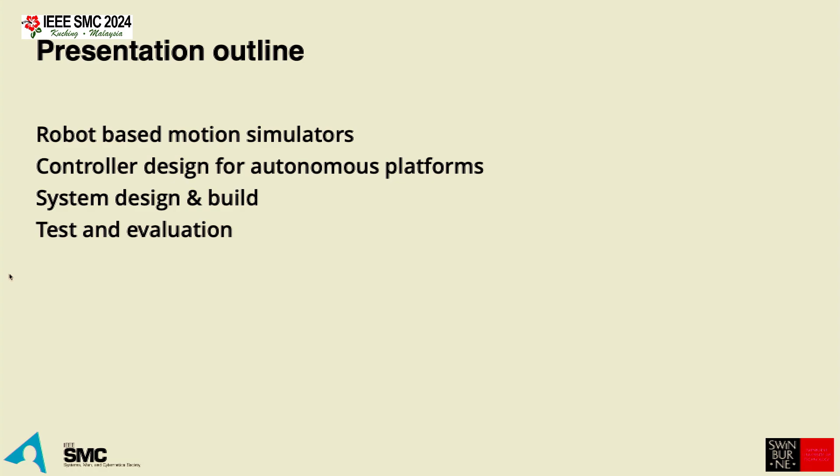The outline of my talk is going to be around robot-based motion simulators, and there's a reason I've selected this topic, which you will see, and its relationship with autonomous systems, then controller design for autonomous platforms, system design and build, and test and evaluation. Test and evaluation, in my opinion, is extremely important. I want to show you the kind of test and evaluation I've done, what it is, how we have gone about it, and the level of complexity involved in terms of real test and evaluation beyond the laboratory.

But before I do that, I actually work for Swinburne University of Technology. Allow me to show a few slides about our university. Our university was founded in 1908 and is among the top 1% of universities in the world. Some of the areas of research where we have professors and academics who are very active.

They are in the area of nanoscale and ultra-low power electronics, working with CERN, the Italian National Institute of Nuclear Physics, ANSTO, which is the Australian Nuclear Science and Technology Organization, and the Institute for Nuclear Science at Kyoto University. This particular topic in terms of design of embedded electronics and radiation-hardened electronics is very important. This is one of the areas we are working on.

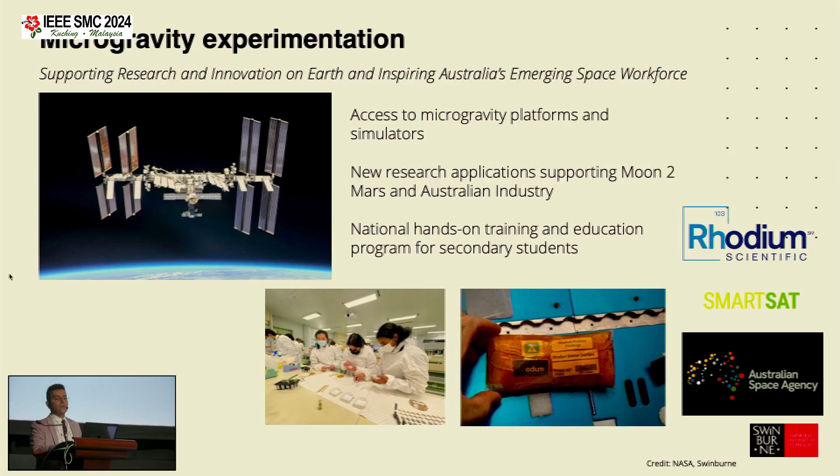In terms of remote sensing, AI for space, astronomy, and remote sensing, our team works with Planet, SmartSat CRC, Ernst & Young, and others, and Professor Kai leads that research. And we do offer engineering courses, anything from certificate level all the way to PhDs. The reason being, we're a dual sector university—not only producing graduate engineers, we also produce technicians, and from technicians all the way to PhD graduates.

Currently, we sit at number 36 in the world in the area of automation and control. Just one of our schools, the School of Science and Computing, has over 5,000 coursework students. By the way, we have a campus here at Sarawak—some of you, as you drove past from the airport, would have seen it. We've been here for over 20 years in Sarawak as one of the campuses.

Some of the other research which is relevant to autonomy is data-driven road asset maintenance for smart cities. Here we have worked with the city council, put a number of sensors on a series of trucks, and these trucks, as they drive around the city, scan, collect information, and look at the road conditions, road sign conditions, cleanliness of the road, and so on, then feed that information back to central points to create a cleaner environment.

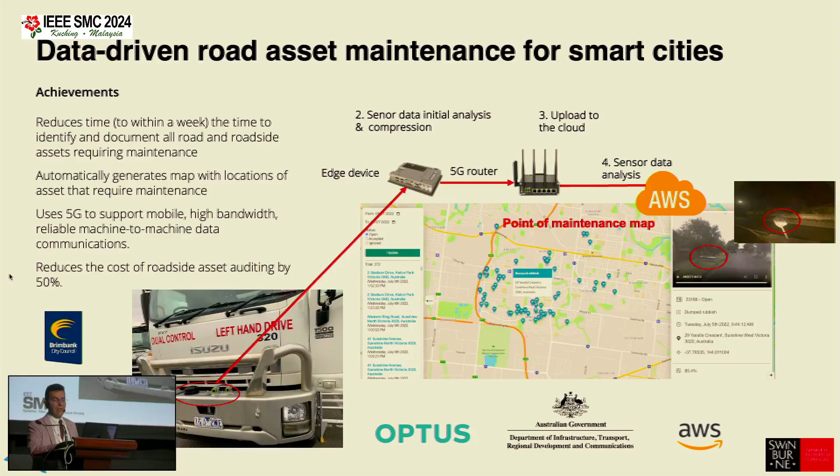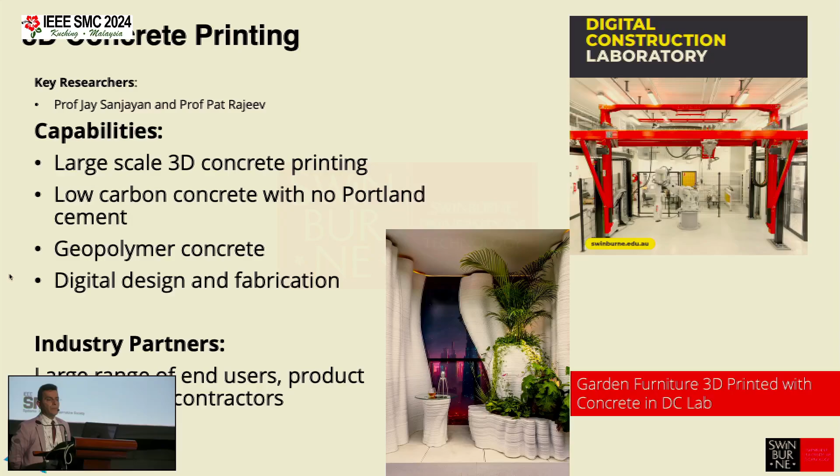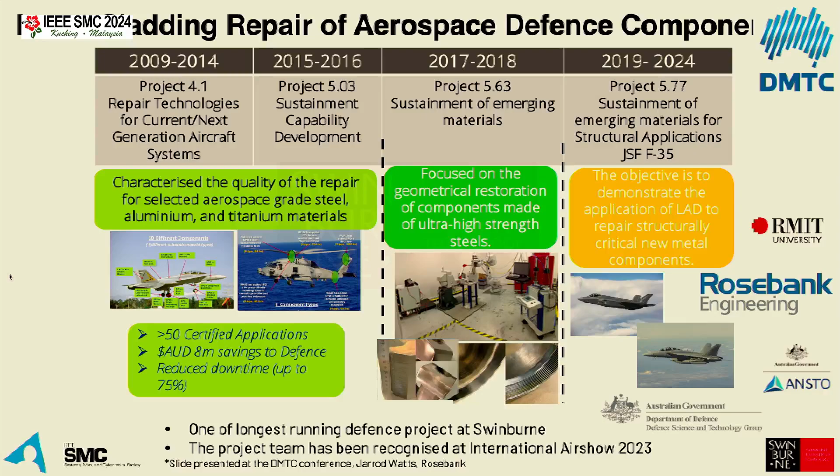Another area we talk about is large robots, robotics. We have several of those at our university in Swinburne, but different uses of those robots. We are using big robots to 3D print concrete. This is a very large work envelope, maybe a third of this auditorium, and it can print concrete. You can create new designs, complex designs to be prototyped. Then in terms of laser cladding repair and aerospace defense components, we work with a number of defense companies in the US, Australia, and around the world, and we have some projects around the JSF F-35 in terms of sustainment. So these are all the hard work of our research area.

Another one is NanoLab 3D and nano micro printing. The guys there are very active in that area of research.

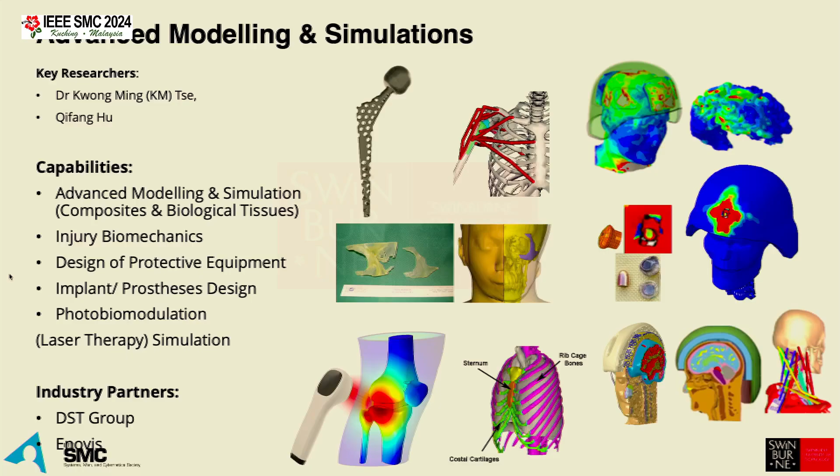And I think this is the second last, modeling, advanced modeling and simulation. We have several researchers looking at design of better helmets, whether it's a bicycle helmet or combat helmet. In fact, a new design having an airbag inside the helmet, and then doing biomechanical analysis, modeling, simulation, FEA, and so on.

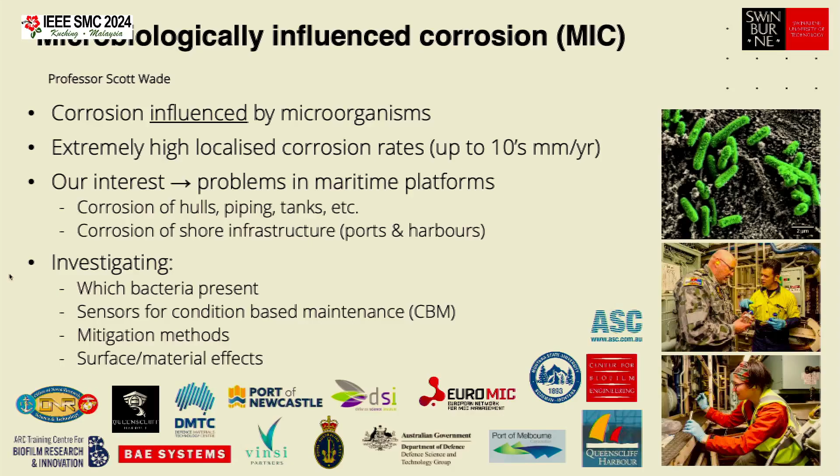And finally, one team is working on certain types of corrosion resistance coating for anti-fouling. This has a huge application from defense, Navy, all the way to contact lens manufacturing, because they have similarities, and we have a national center of excellence around that.

But let me come back and talk about the topic here. I want to first specify and define a couple of terminologies: human in the loop, and human on the loop.

A definition of human in the loop: a machine that performs a function for some period of time, then it stops and waits for human input before continuing.

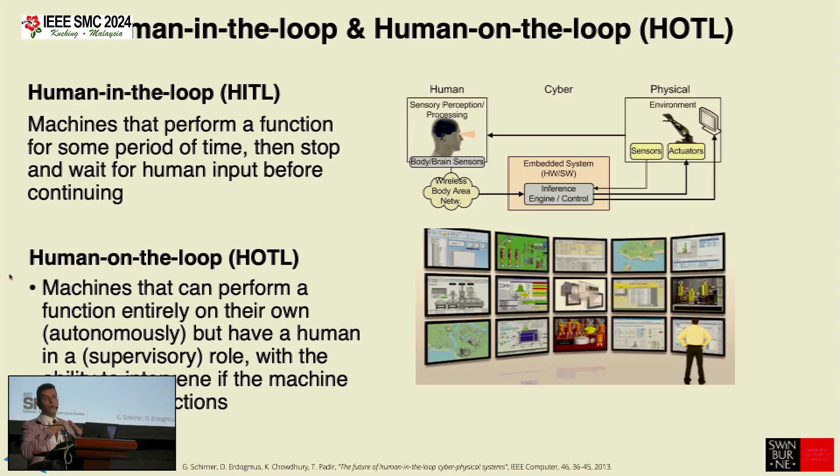So human in the loop, human on the loop, but I've always argued that we never want human out of the loop. I've put my neck on the line, and I've argued for many years, and that's my position. There are some good reasons when you want to develop for the military and those kinds of things. You don't want humans to be out of the loop. You always want humans to be at the apex of control decision making.

This is my position. So in terms of perception and sensing in autonomous systems, perception involves sensation and interpretation, including sensation for evaluation and detection of objects in unpredicted environments. This is very important, because if we can have some sort of prediction in an environment, if we are talking about using vehicles other than in cities, then the unpredictability plays a greater role.

So then in terms of sensing, autonomous systems require enabling sensing technologies. This is for 3D measurement, state estimation, intelligent mapping, and object recognition. Not all of the objects that we deal with in the city area are the same as if you wanted to use for military use, so there are some differences.

So then all of it comes down to trust. This notion of, if human is in the loop, how can we gain trust between human and machine? If human is on the loop, how do you achieve that trust? And then how does machine trust human? Is there a need for that? And then finally, how does a machine trust another machine?

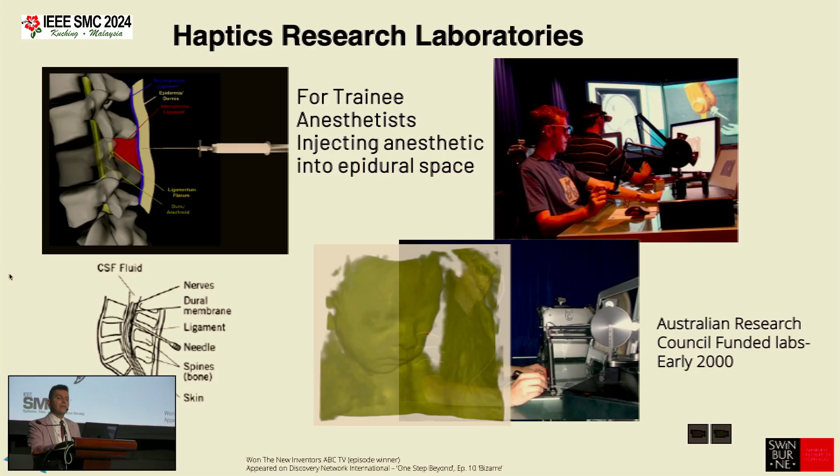We developed a whole series of technologies, and some of it were used for the counter-IED task force, remotely deploying using the system. The robots are haptically enabled, so remotely we can defuse bombs and so on. But as a result of that journey, looking at all of the haptic device manufacturers, such as Sensable, Force Dimension, Haption, and so on, we looked at the capability of those haptic devices, and the kind of capability we were after, which was multi-point haptic, did not exist in the world in a rugged manner to be field-deployable ready.

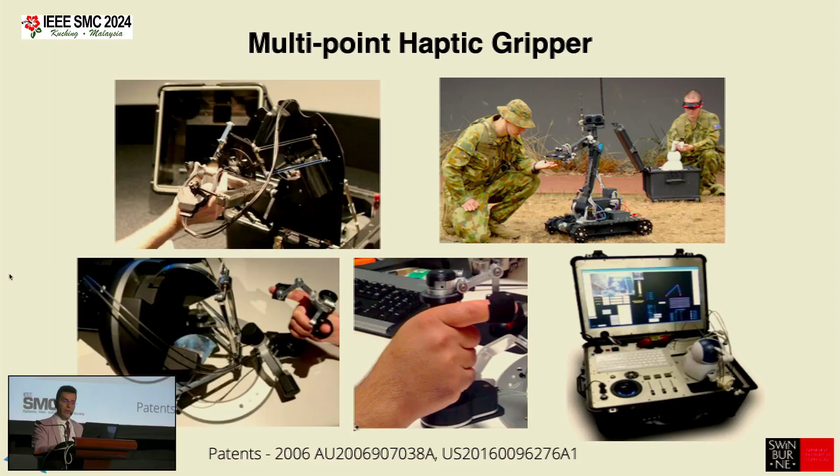And that's where we went back to fundamentals, designed and built our own multi-point haptics devices, commercialized it, turned it into a product, and then went into utilization. Now playing with haptics, backdrivable systems, making teleoperative systems haptically enabled.

In parallel, I started looking at motion simulators. This was when Gino De-Gol patented a robot called Robocoaster in Europe for theme park rides. I approached him and said, look, I'm in a university, I'm not into games, because people won't take me seriously if I talk about theme park rides. However, I'm interested in enabling this technology to make it into a motion platform, to put a human in it, to make it backdrivable, to turn it into a flight simulator, and then into a land-based simulator. The beauty of this system was that the reachability and work envelope was far larger than traditional motion simulators in the market, like Gough platforms or Stewart platforms.

And then playing with haptic technology, looking at haptic steering wheel, haptic gear shift, haptic pedals, and all those kinds of things, having had that background enabled us to put some novelty into this platform, showing how it is fundamentally different from traditional motion simulators, and in particular how it is haptically enabled. You need a haptically enabled motion platform because when you use it for driving or flying simulation, to give realistic feedback over and above motion sensation, development of your washout filters is very important, because it all comes in to give you a greater sense of motion and realization of it.

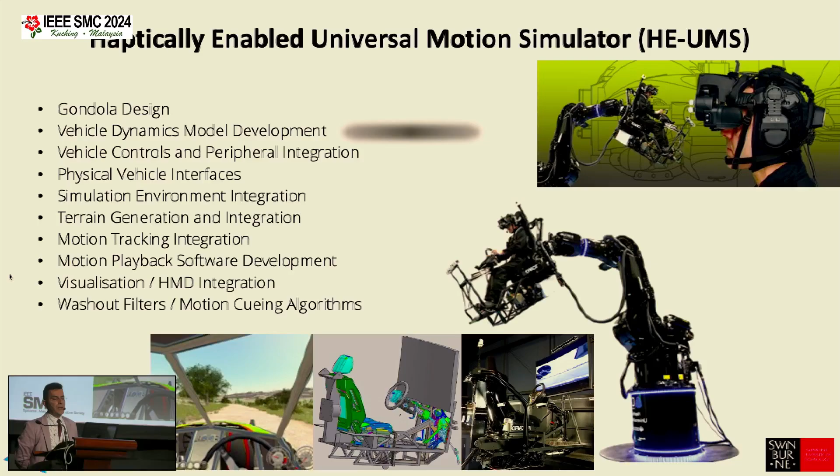So we had to design gondolas, look at vehicle dynamics model development. These are really serious areas requiring deep knowledge, and a lot of automotive or vehicle manufacturers, whether land, air, or marine vehicle, work in this field because that's their core business. So we're entering an area, and we're blessed that since the idea was crazy and novel enough, it attracted the automotive car industry, some of the largest in the world. I won't name the car companies because I'm not advertising for them, but you would have heard of those big giant companies both in the US and Japan.

How we argued this system is better than traditional systems was that the range of motion it gives you is far greater than a traditional Stewart platform. And then I identified the holy grail, a particular range of motion that traditionally the automotive industry never looked for. It was a military application, in particular driving tanks. When you're at the knife edge on top of a hill with a 55-ton vehicle, the position of your barrel and how you need to maneuver and control your throttle to drive becomes extremely important.

And there was no motion platform on this planet that could provide that. So we had General Dynamics, Lockheed Martin, Thales, and the CAE systems and so on. They had all been designing and building motion platforms for 40 years. But nobody had identified that capability gap in the market. I identified that and then won a contract with defense and provided platforms.

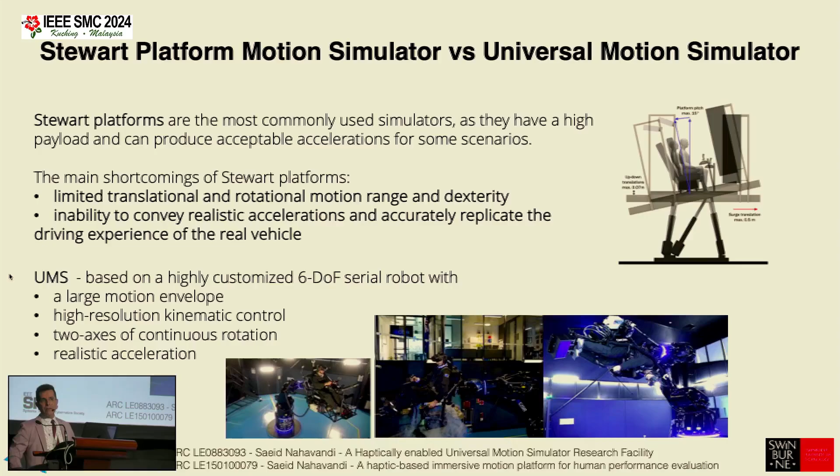Now let me come back here to show you what this system does. Okay, I'm there, I'm trying to find my mouse to see if I can get this working.

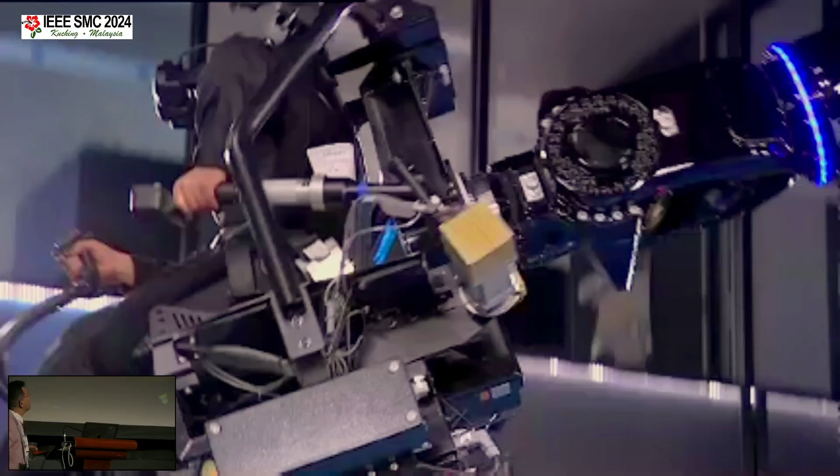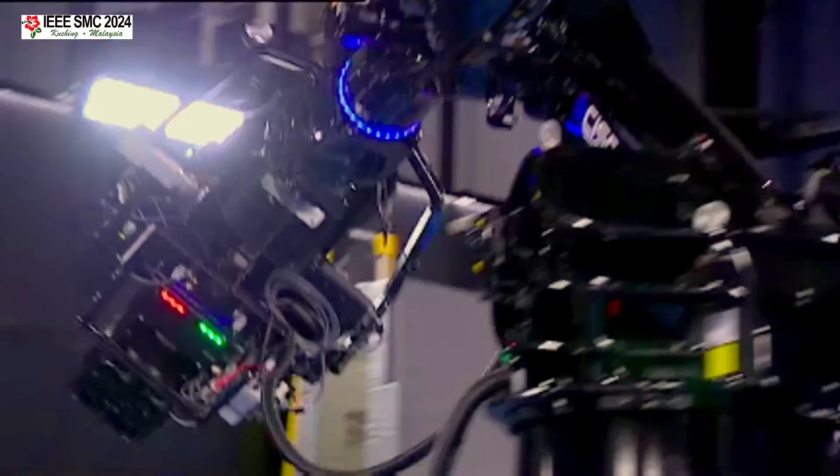Give you a warning. If you're a high-tech junkie who gets jealous watching someone else enjoy the latest and greatest thrill ride, look away now. On the other hand, if you're about to jump into a military chopper or a fighter aircraft and go into battle, you've got to check out this. It's called the Universal Motion Simulator, or UMS, where a pilot is perched on a 7-metre long robotic arm, capable of exerting up to 6 Gs of force... man at the controls of this next generation.

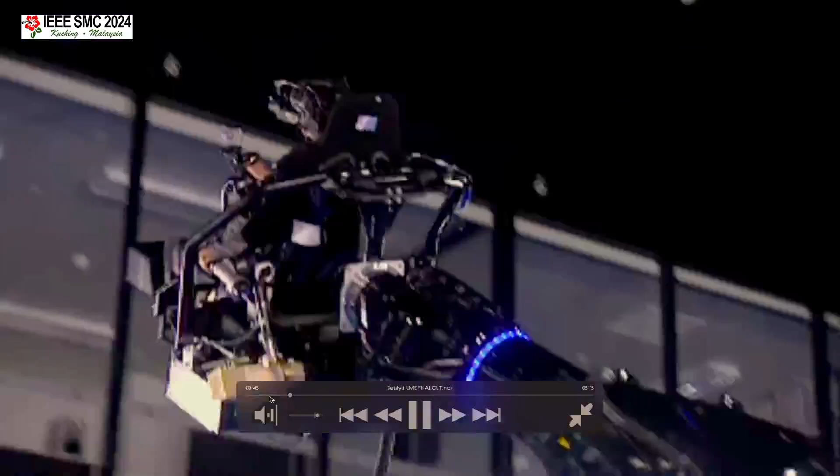It's called the Universal Motion Simulator, or UMS, where a pilot is perched on a 7-metre-long robotic arm, capable of exerting up to 6 Gs of force. That is impressive. The man at the controls of this next-generation motion simulator is Professor Saeid Nahavandi.

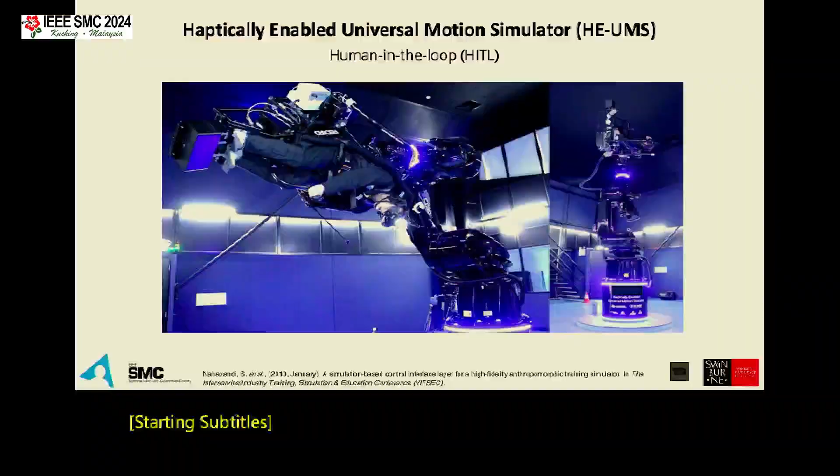The reason I'm pretending that I can fly, but I can't fly a helicopter, a little bit through the simulator I've learned. But what we're trying to show here in terms of designing and building a Black Hawk helicopter, for example, is the kind of range of motion it could give that the traditional simulator could not. And then a particular area called upset training - if any Air Force pilot here, they will know. So to provide upset training, you need to have range of motion which a traditional Stewart platform cannot provide you. And all of a sudden, this became really a popular platform.

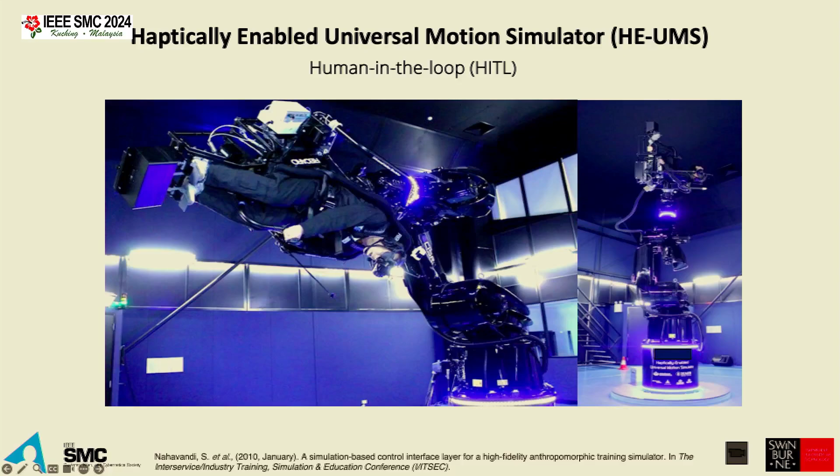So it was a theme park ride. I turned it into a simulator with a capability gap, and then I actually pushed to win projects and research. Then we looked at other types of vehicles, and I didn't stop there. I developed a version that sits on a container base. Then you can take it anywhere - you can put it on a ship, you can take it to any site. So we call this one a mobile UMS.

And again, the devil is in the detail - large load, safety, you're putting a human inside the machine. First time, I always put myself inside all of these machines, vehicles, and so on, and they video me. If I didn't die, that means it's good for other people. If I died, I will know what happened to me.

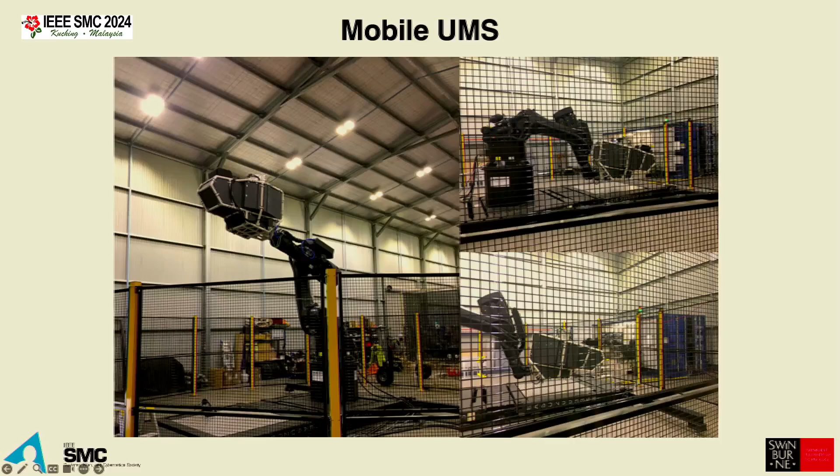So then putting it on a system like that to make sure that it is safe, and to get all of the safety certification to go to be used in industry - I think that step is extremely important. So that's what I mean, that taking it from the lab, but once you actually want to turn it into a product or to be safe enough to be used, there are other levels of complexity in terms of engineering.

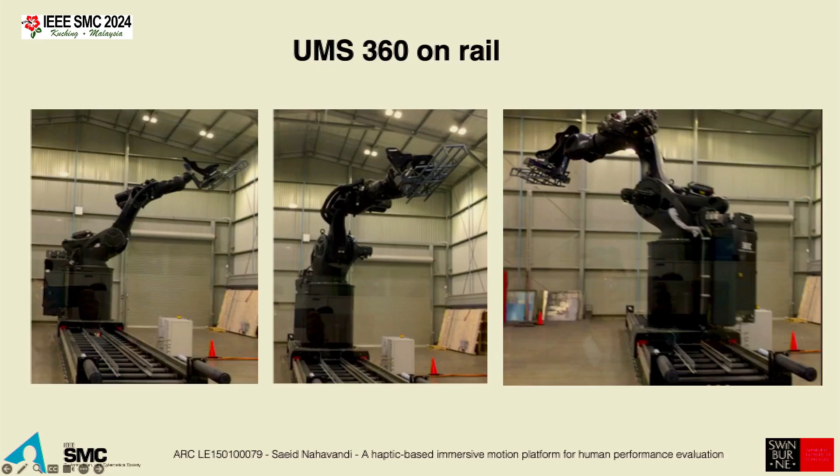And then we developed another version called the UMS 360. So now it's a giant KUKA robot. In fact, let me show you what I mean by that. This system - so you have an entire system rotate.

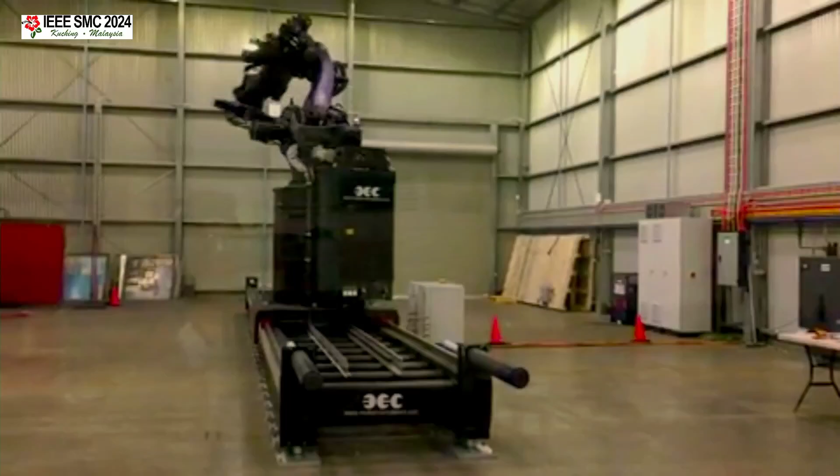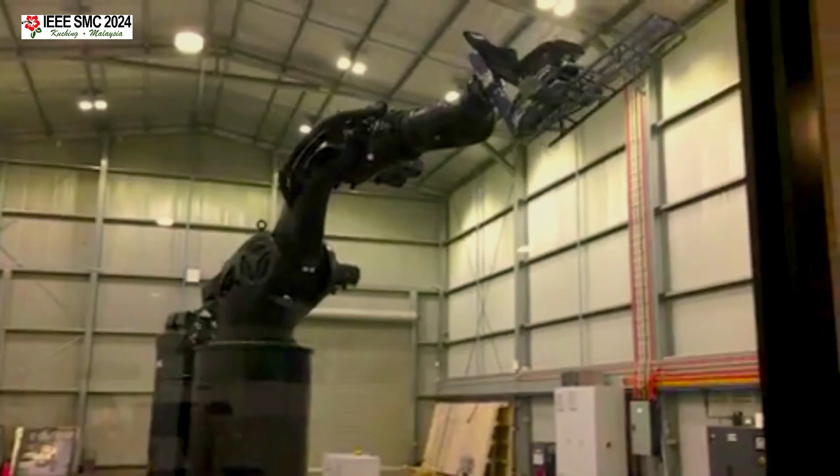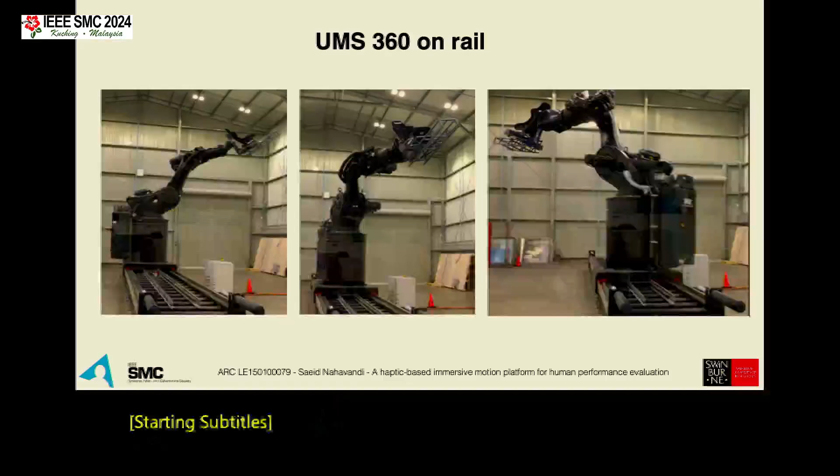So we modified the slip ring, modified the whole controller system design on it, and used a direct drive linear electric motor, with a good number of tonnage on it, and then in terms of control, back drivability. So this particular system has 3 continuous axes of rotation. And then the only other one in the world is DLR in Germany. But this one has other capabilities that DLR doesn't have. So that led us to actually have a joint research project with DLR.

Then going back to that - to validate the simulator, to give you that real sensation, then to become a platform for R&D, and then to put a crazy driver in it, then to run edge cases, dangerous cases, to collect data which then can be used for your AI and machine learning for your autonomous vehicle. That's the connection. A lot of Carla and other software out there, when they are trying to input edge cases, it is very different when you are actually putting in all of the vehicle dynamics behavior of a real vehicle.

You have validated that the simulator is almost a true representative of a real vehicle, and then you drive safely, do crazy things with it, so produce all of the data for edge cases for your autonomous vehicle to learn. So, let me go again here.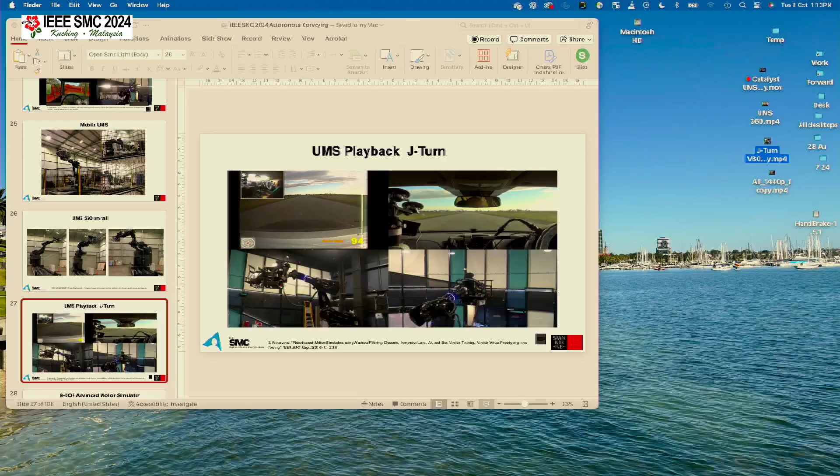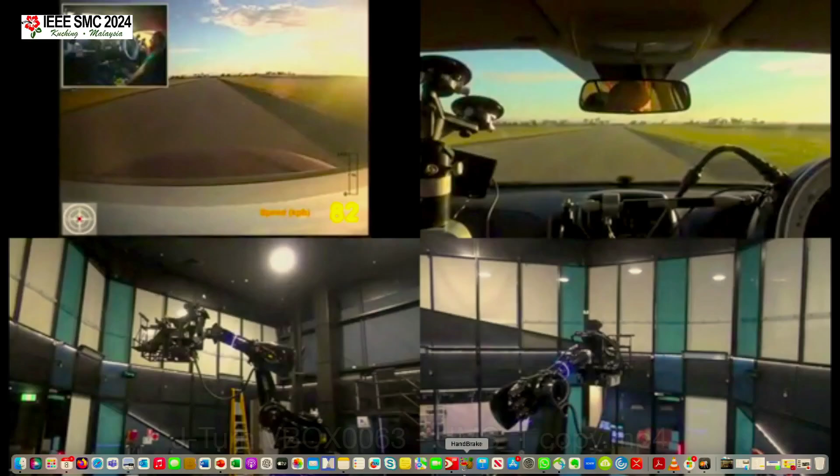So here, look at the top right - a sensorized vehicle, somebody sitting in it, with the ADAS system running, but it's connected to our motion simulator under here. The person sitting gets the exact motion sensation. So we had put IMU sensors on the seat here and on the vehicle. They replicate, produce almost one-to-one.

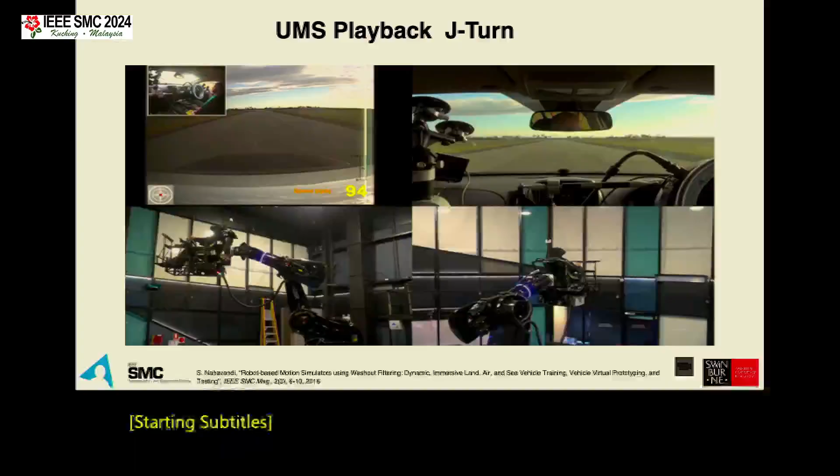So then by bringing people from proving ground working with us - and those are the ones that car industry uses when they are actually developing vehicle prototypes - to validate our simulator. Then we were confident that actually the simulator now can produce almost realistic motion of a real vehicle. And then after that, we said, okay, it's great, then maybe the simulator can be used as a prototyping platform for the car industry.

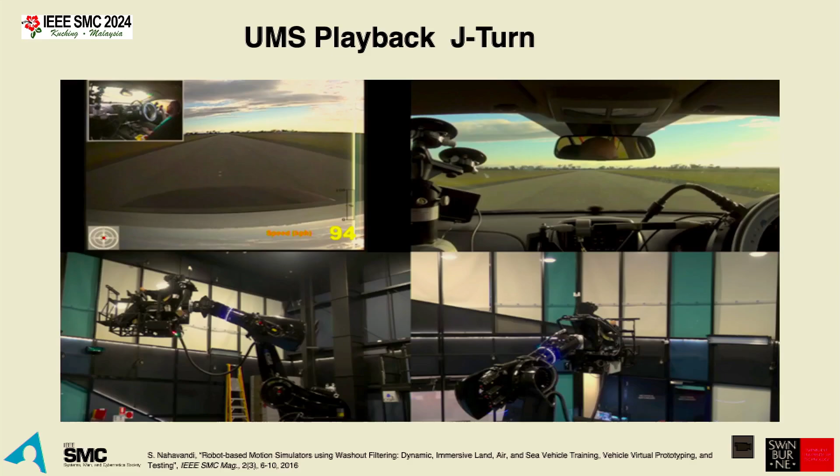Now, a lot of car companies, these days they use simulators as part of the prototyping to reduce the number of prototypes, so they can reduce that product design cycle, reduce it, and also reduce the cost. And then do a lot of experimentation - it's cheaper in the simulator than doing it in the proving ground, like nighttime driving, visibility, ride, comfort, handling, and all the rest. So this is where we landed, actually working with the car industry. I was talking about using that big simulator.

Once we actually sold many of those, that went, set up a company, startup, then defense bought it, and 80, 90 people employed as part of the company. Now we are competing with CAE and Thales and the likes. We secured that market. Then I went back, looked at that.

That particular system can produce high amplitude but low frequency. So I worked with a company in the UK, Ansible, redesigned their platform, and then created another platform. This one won the Queen of England Design Award three years back, and it has 8 degrees of freedom.

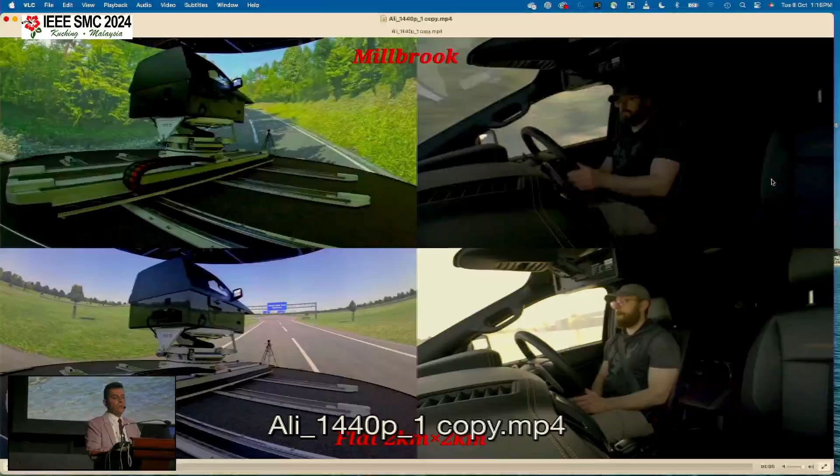And this particular system, you can draw... okay, no, you cannot. I'm on a different window, you cannot see. Maybe what I'll do, I'll show you one of our very excited drivers, you could say.

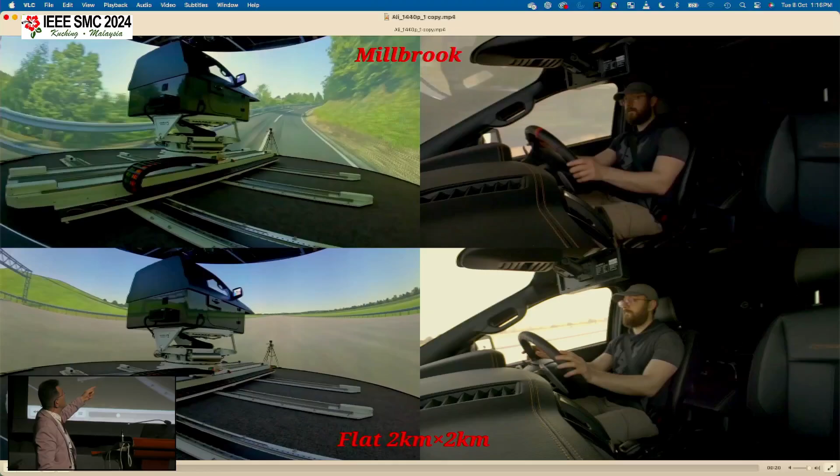So we have a proving ground, we have a racetrack, and this one you can see is 360 degrees wrap-around, so all of the scenes look realistic. This is Millbrook, and you can drive at high speed, 250 miles an hour.

So then I used the platform for behavior analysis, how people take orders, whether they take orders under stress. Then there were other things in terms of drug or alcohol influence. So there is a whole heap of research you can do safely on a platform that can really give you the kind of motion fidelity that is needed.

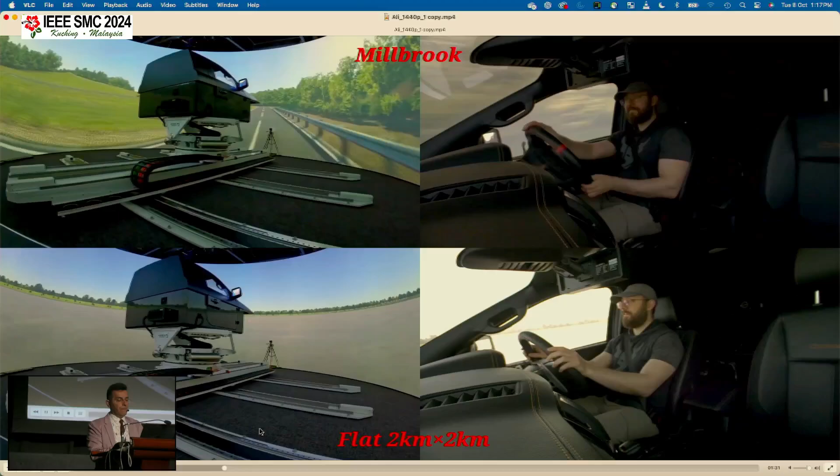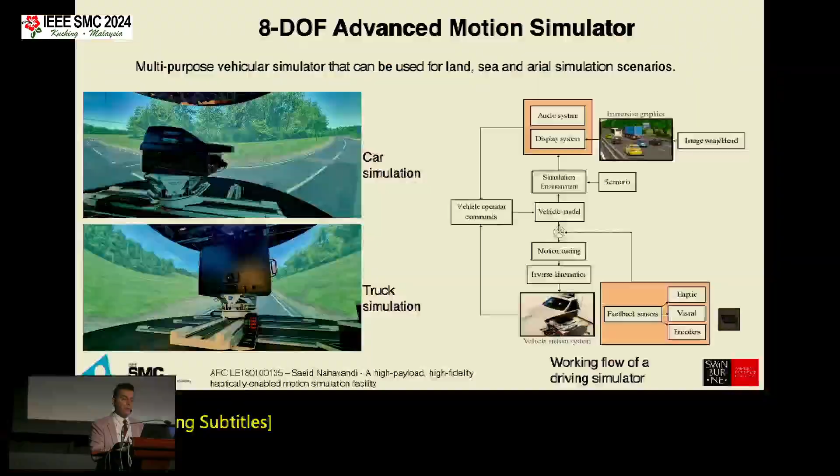And the other thing was having people sit in it for hours to drive and see what happens. So instead of really driving long distances, you put people inside the actual simulator. So then we collected lots of data as a result of this.

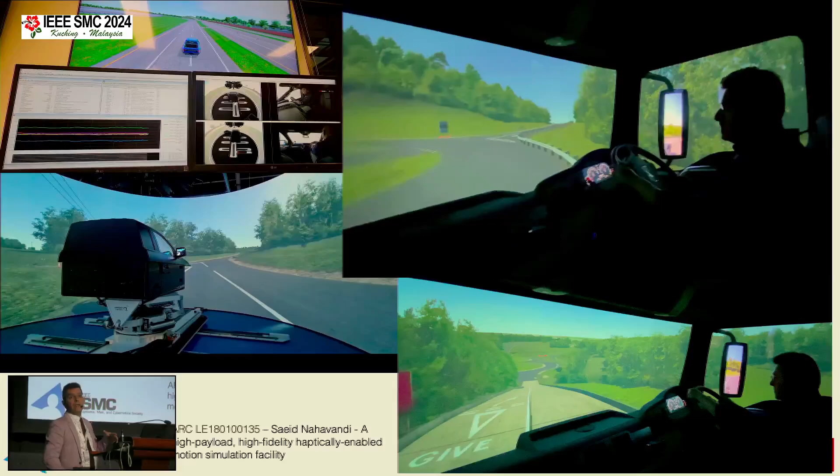And then top right, there were two platforms, land, small vehicle, and then say 40, 50-ton vehicles. I myself can drive a big rig, articulated, non-articulated. I'm not a bad driver, by the way, I've driven for several years for test and evaluation.

So then the idea was to create an environment and simulator for the big rigs, not only driving forward, as you can see the inclination is quite high. These are again in the proving ground. When you have a big rig, you're going down and then reversing. Nobody in the right mind reverses on a really sloped area, that is not part of the test.

So I was creating a simulation environment where when a big 50-ton vehicle has gone down, you stop halfway, and then can you reverse backwards, and then there is a roundabout. Going forward in the roundabout with the articulated lorry is easy, but reversing back around the roundabout is the next level of complexity.

So that particular system, we actually used for collection of data, also for training drivers. But at that time, the military had enough confidence that we do understand big vehicles, big rigs, we can drive big rigs.

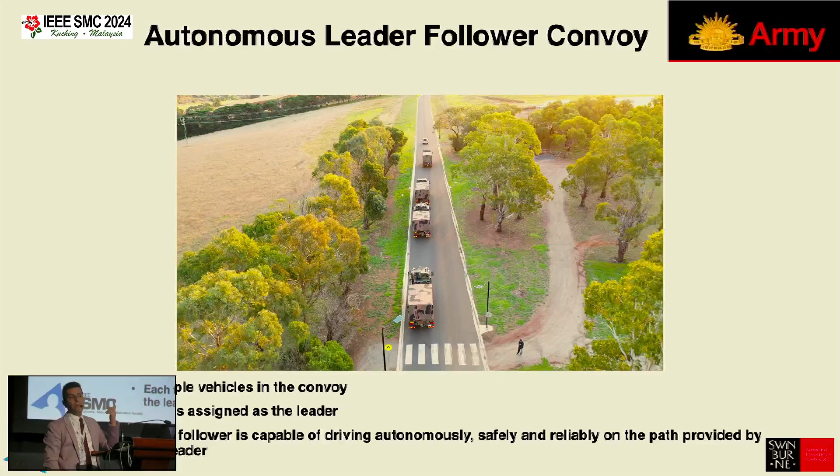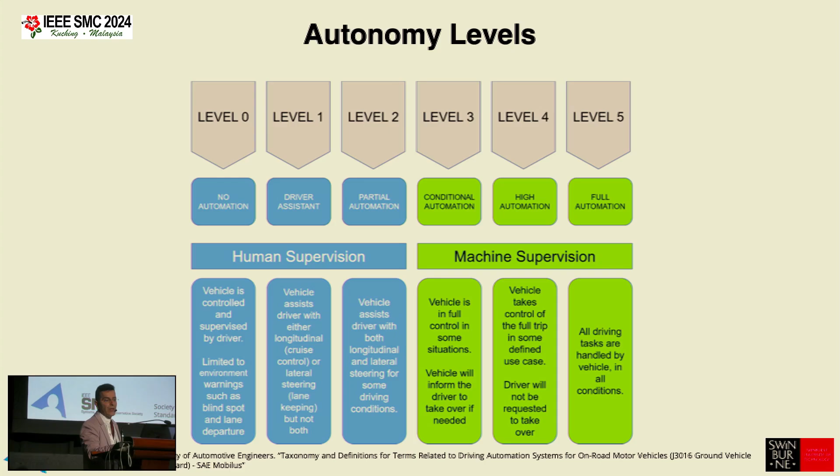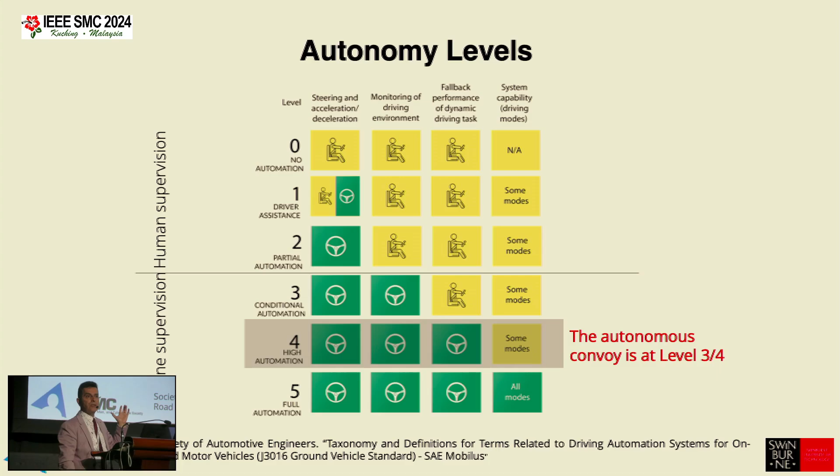So then looking at levels of autonomy - I apologize if you already know this, I won't read the definition, but so you know what level we are talking about: level 2, level 3, and between level 3 and level 4. So the technology I developed is around level 4, the autonomous convoying sits between 3 and 4, okay? So there were a lot of challenges, and at the end I will tell you what the challenges are, but I had to deliver the project.

Lockheed Martin in the US have, and I know exactly where their technology was, and then we were building beyond what Lockheed has done in terms of their autonomy. So looking at coming up with autonomy.

Subsystem architecture, so follower vehicle, lead vehicle, and then I was lucky enough, I got my training with defense, could drive big rigs, and was trained to actually train other people to drive big rigs. Not only that, then I became the loader, loadmaster loader. Loader is the next level, that you load these vehicles onto transporters. Now, when you want to load this vehicle on a transporter, you have only half a centimeter of error when you are taking it on. Otherwise, the vehicle falls off and good luck, you kill yourself.

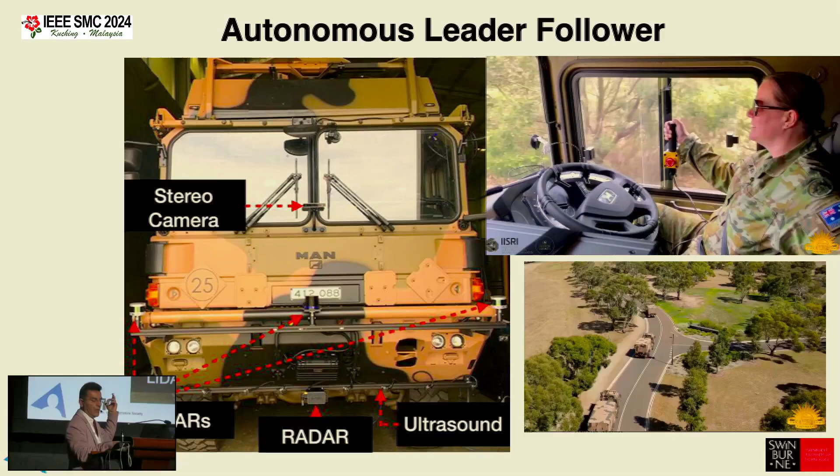So they forced me to do that. So I actually understand the length of the vehicle, the level of fidelity, level of control, that if you make a mistake, you pay a big price. So I became good at it as it happened. I have videos I can show, and then I had to train others. So I trained researchers to be drivers, to be engineers, from the laboratory to the field.

So now we are talking big robots. We are not talking small robots, you know. Traditionally, the way it's done, people on the proving ground, not all of them, they are good engineers, and they are good AI and machine learning developers, but they are not control engineers and so on. But bringing the guys that are actually sitting in the vehicle, feeling it, and coming back to the lab to develop the technology, it takes the next level of acceleration towards development of the final system, to shortcut that. That's what I try to achieve.

So in terms of perception, obviously all of these object detection, lane detection, road segmentation, and then you have localization, local, global, obstacle avoidance, and then, being a land vehicle, you have to do steering and acceleration and brake. Now, I just want to ask, how many people do we have here that can drive a really big rig, big truck with a diesel engine and 30-odd gear combinations?

We have only one in this crowd, okay. Oh, fantastic, I didn't know. So we are good truckie friends now. Okay, that's great. So at least we have two people here.

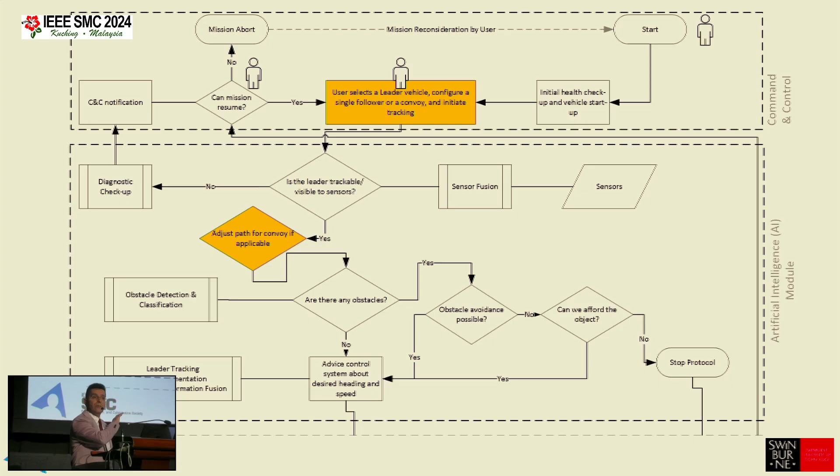Then, being a guy educated in the 80s, I went back to my roots and said everything has to be recorded, to develop a flowchart, to make sure that everyone, our client, understands step by step - to do code design, code development, bring in subject matter experts, show what we are doing, is it right or not? Do they accept it before we even start doing the first line of code? So that was the approach. It gave them the confidence that what we were doing was the way they wanted.

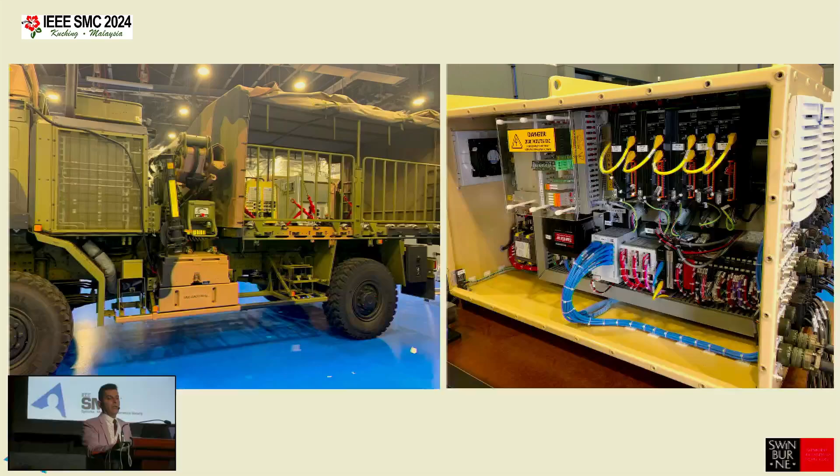So when I say that we develop controllers, it's not that cardboard box. As you can see, they are ruggedized controllers. We developed a secure mobile cloud sitting on the back of the vehicle with all of the control system, GPUs and so on, with all of the climate control. And you can see that they are all military grade connectors and so on.

Pushing the team to that level of design, development, and ruggedness is a little bit different from operating in the labs. Everything had to be retrofitted, meaning that within 2 hours we take all of the autonomy pack off, and then it took 3-4 hours to put the autonomy pack on. So it can be any vehicle, doesn't matter the make or model. In this case, we had all of these German vehicles, MAN.

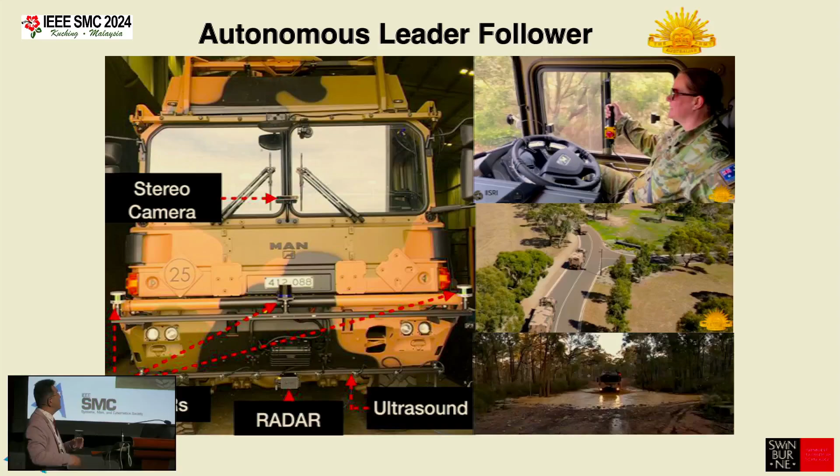By the way, the German military themselves were interested in how we did this in Australia. So this is the autonomy workflow: LiDAR, cameras, GPS, radar, and so on. In terms of localization, what we did in terms of motion planning, and then motion control.

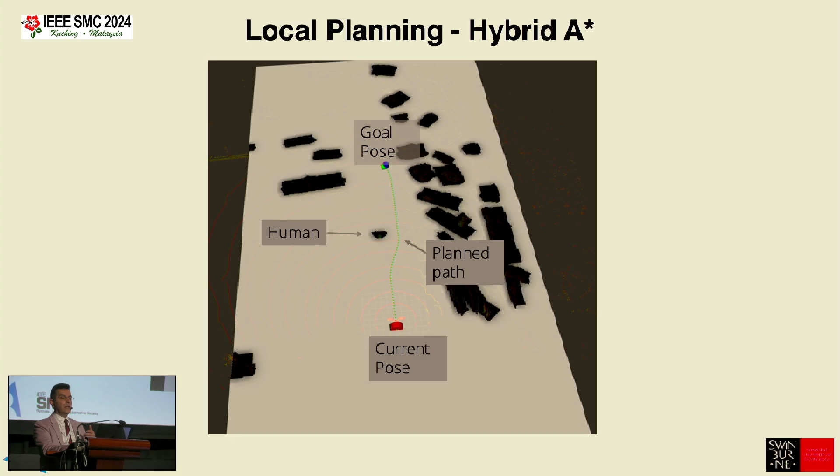So then we started putting some of the algorithms, taking the vehicle on the road, trialing it in terms of localization. For motion planning, we used different algorithms to see what works, and I'm sure many people in the crowd have been playing with MPC and combinations. We played with all of that, and always used simulation to see what it does before putting it on a vehicle.

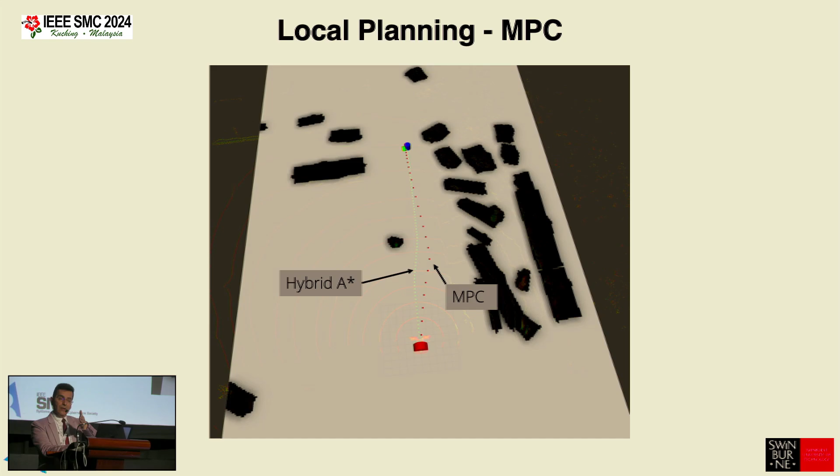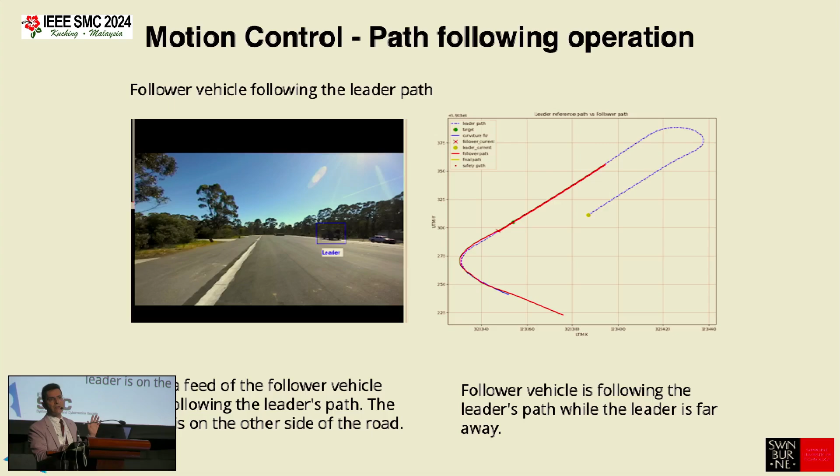When it was on the vehicle, I was the guinea pig, actually experimenting on the vehicle before taking it on an actual convoy. Then we collected all this data - over 3-4 years, hundreds of hours of data collected to fully analyze and show our client.

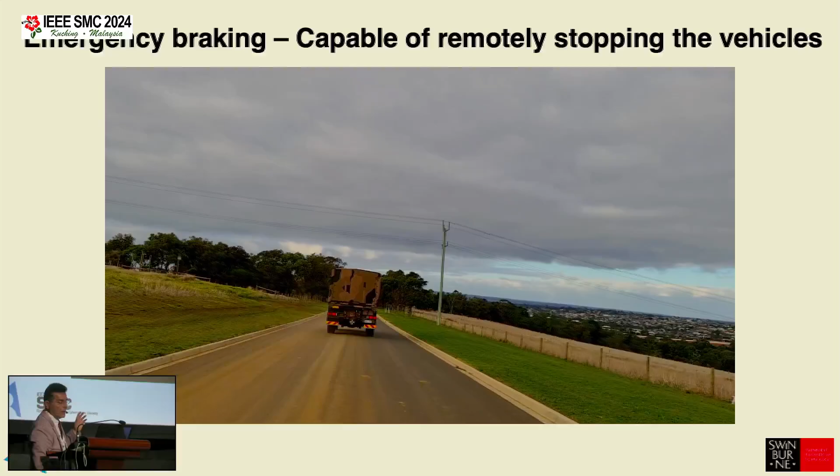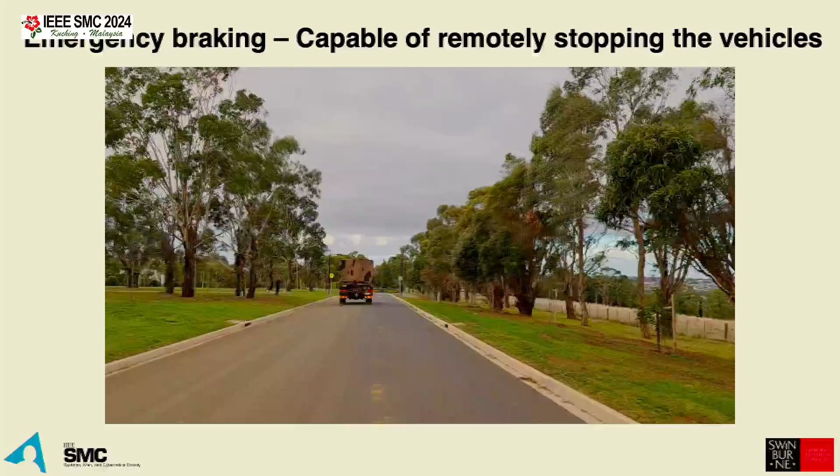Now look at this, going to the extreme - pulling the handbrake on a big truck. Watch what happens, and this is me driving it. Everyone thought I was crazy. This is at 60K, then I went to 80K, then 100K. And then I learned at what speed you go before you just kill yourself - and I didn't kill myself.

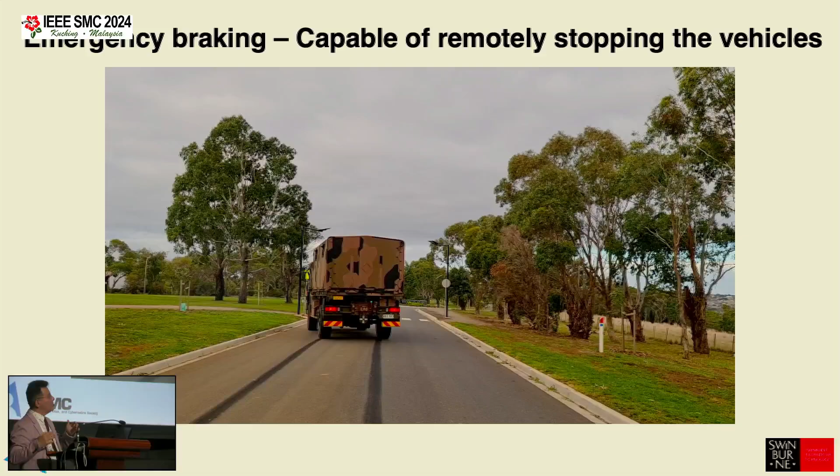The way I actually burned the tire - I think if you've driven a big vehicle, 50 tons, like big tanks and so on, braking, the whole ground goes on fire with the friction and so on. So I was trying to look at some of those extreme conditions.

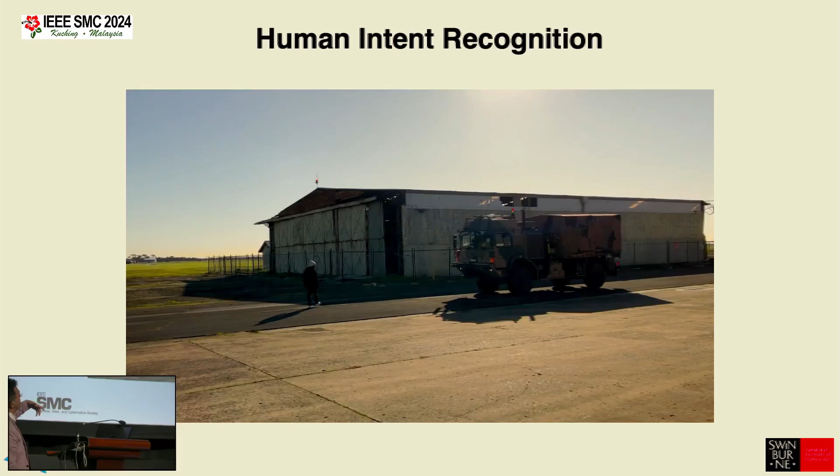So here, for example, the truck convoy is going and a person jumps in. I had gotten the airbase to myself, then used the airbase grounds to actually do a whole series of experimentation to see what it is.

When these vehicles are following, the vehicle follows what the lead vehicle at the time was doing, but it also has its own local autonomy, local planning, local control - so there are 2 levels to it. Then, to prove it, we jump in front of this vehicle and it stops, doesn't kill anyone if we wanted it to.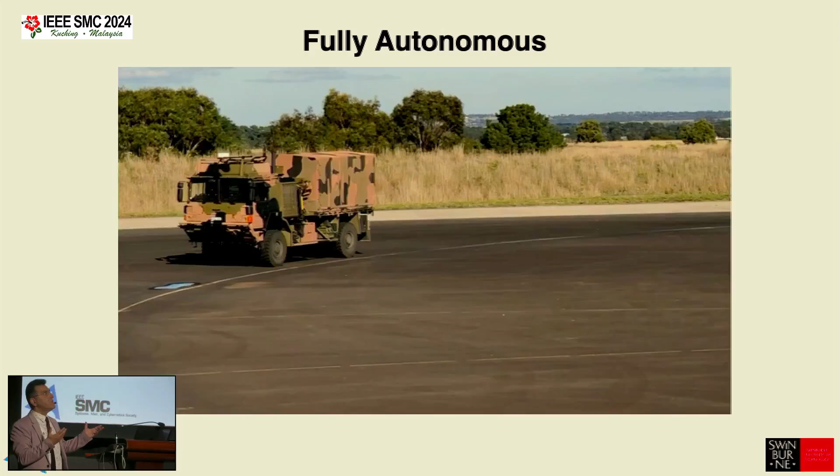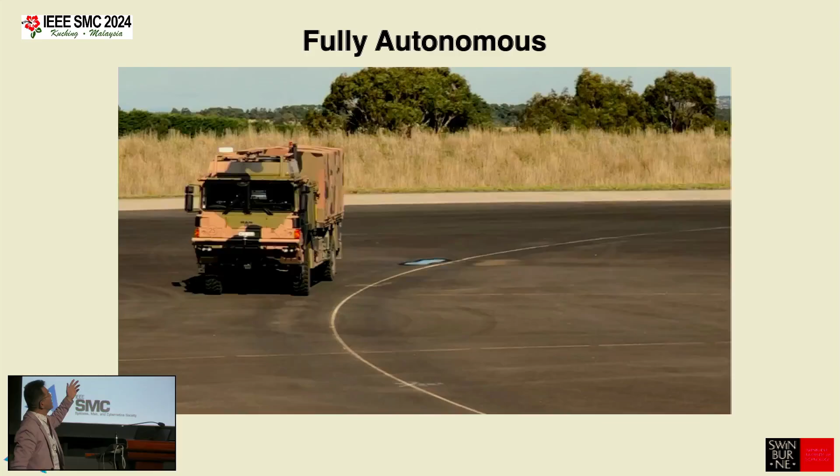So let me move on, there are many things. We had to bring camera crews to prove the filming of UGVs on the ground, that it's really autonomous and nobody's pulling wool over anybody's eyes, because money was involved in terms of delivery. These are test and evaluation at this level that get recorded; an auditor comes, 30 or 40 people sit, evaluate, record, and analyze, and go through the depth of everything you're doing.

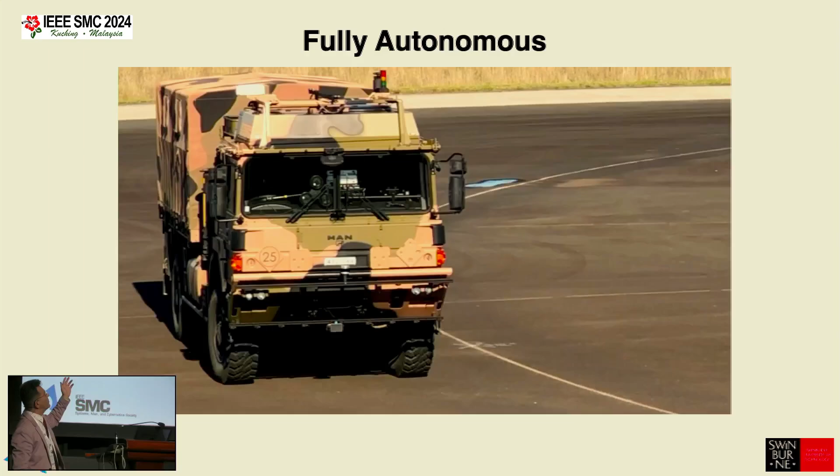And then filming and producing it as evidence.

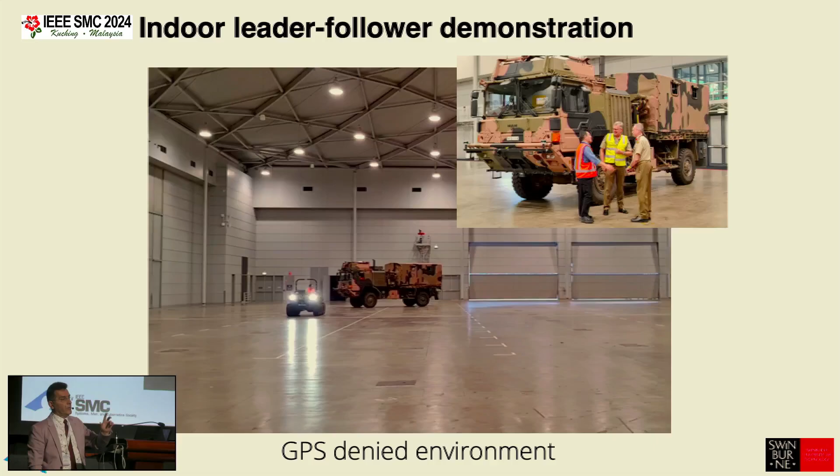In one of the things, we had the chief of army, we were indoor, and they said they want this thing to go inside the large exhibition hall to prove it can autonomously work in a GPS-denied environment. So we had to prove that. We have videos showing the chief of army sitting in it and driving fully autonomously.

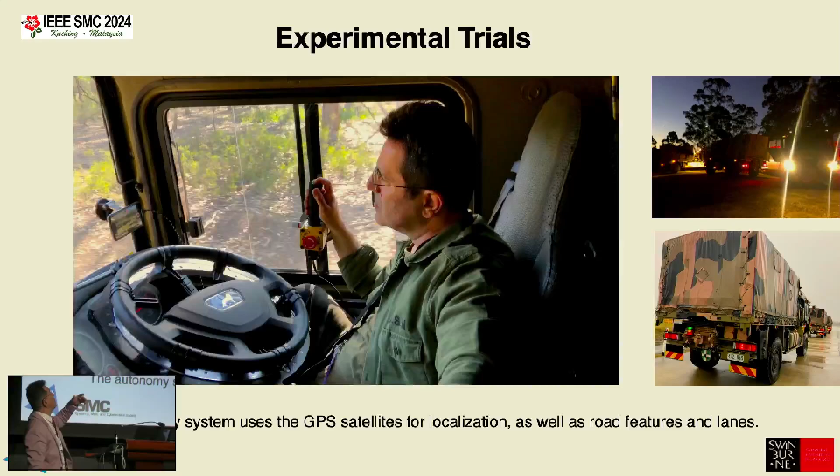This is one of the earlier trials where we have a dead man's switch, which you legally have to have in these areas, to prove there is somebody if something goes wrong. The area you see has no lane markings, it's bushland. I won't say where it is, but there are things that your normal off-the-shelf vehicle technologies, like what Google X, Apple and others are developing, cannot perform in these kinds of environments. That was the capability gap.

Then with single and convoy vehicles, we came up with an environment where you can define in a convoy how many vehicles there are, which one is the lead vehicle, and if the lead vehicle is taken off or killed, another vehicle automatically becomes lead vehicle. You decide which one becomes lead, and then how to do collision avoidance.

Some of this work, BAE Systems originally was doing, and then the contract I got beyond BAE Systems was to do obstacle avoidance, which BAE Systems could not deliver to our defense.